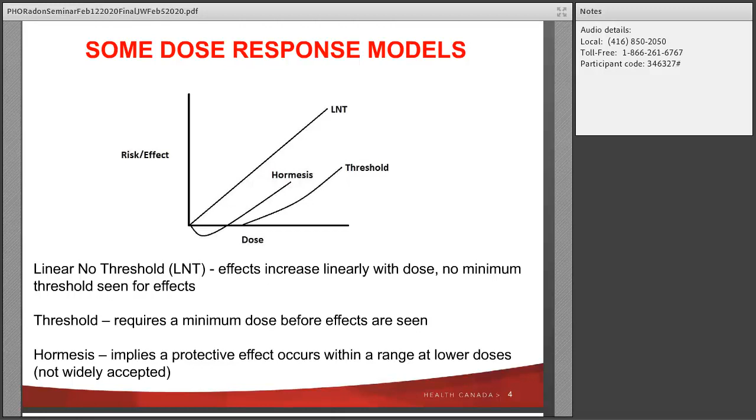But the universally accepted dose response model is the linear no threshold, and that's a straight line through the origin. There is some uncertainty in the LNT down at very low doses, but the scientific community generally accepts the linear no threshold model for radiation-induced health effects.

Two slides here on the history of radon before I hand it over to Kelly for her next part of the presentation. And this is kind of how we've gotten to today over the last more or less 500 years or so. So way back in the 1500s, in a particular region of Europe, the Ore Mountains, which is a mountain range that separates Germany from the Czech Republic,

metal miners were getting extremely high mortality from respiratory diseases. And it was called mountain sickness, among other names. And it wasn't uncommon for wives to have 6 or 7 husbands during their life, because they would just all die in a very short period of time, like over a number of years. Fast forward to 1838, when German pathologist Johannes Muller discovers lung cancer as a disease. A couple of decades later, lung cancers are found in autopsies of these European miners.

1896, the famous Henri Becquerel discovers radioactivity. And a couple of years later, the Curies discover radium, which is the immediate parent of radon-222. And then a German chemist named Frederick Dorn in 1900 discovers radon, the gas, naturally occurring when, not surprisingly, studying the radium decay chain. In 1924, it's hypothesized that radon could be a cause of lung cancer in miners from the Czech Republic, again, where miners had a very high incidence of lung cancer, and the measured radon levels in these mines were very, very high. As the 20th century goes along, by the 1950s, it's recognized that radon causes lung cancer in underground miners.

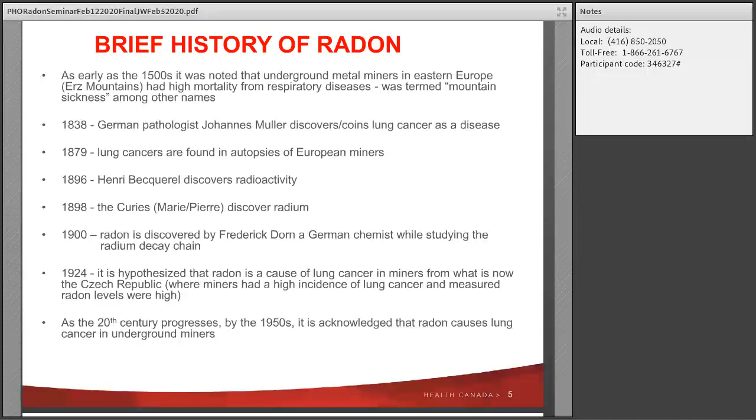Fast forward a little bit to 1984 in Pennsylvania. This is a very famous story. I know some people might already know. A gentleman named Stanley Watras, who was a nuclear engineer, was walking into a newly built nuclear plant. And this is before the plant has gone critical. There are no nuclear reactions going on in a core right now. He sets off the portal detectors walking into the nuclear plant. And of course, all the radiation safety professionals start scratching their heads.

Long story short, they find that the source of this radioactivity all over him is coming from his home, which was sitting at something around 100,000 becquerels per cubic meter. The U.S. EPA very quickly adopts a radon guideline at that point of 148 becquerels per cubic meter. By 1988, radon is classed as a human carcinogen, class 1A, top of the heap by the IARC folks. And Health Canada promulgates the first Canadian radon guideline at 800 becquerels per cubic meter. There was no scientific program associated with this. This was just a radon guideline.

In the 90s, researchers start to report lung cancer studies from residential radon exposure. 1998, the BEIR VI report comes out. And in the early 2000s, a number of famous epidemiologists start pooling results from residential radon exposure studies. And it's recognized that radon at levels in homes is the cause of lung cancer.

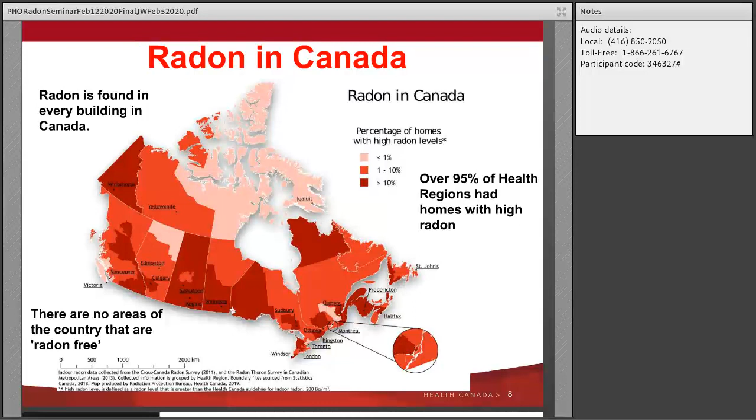So what are the health risks of radon? Radon is the leading cause of lung cancer in non-smokers. We estimate that over 3,000 lung cancer deaths each year are radon-induced, and it's the only known health effect associated with long-term exposure. Smokers also exposed to high levels of radon have a significantly increased risk of developing lung cancer. And really, the story of radon from a health perspective is it's preventable. There are actions that can be taken to reduce exposure and reduce your risk of lung cancer.

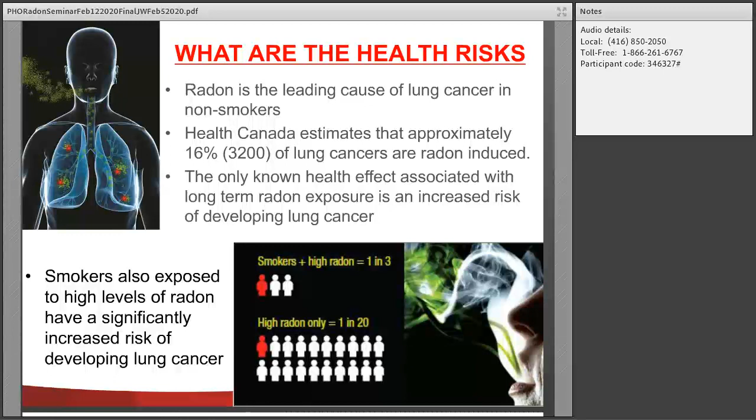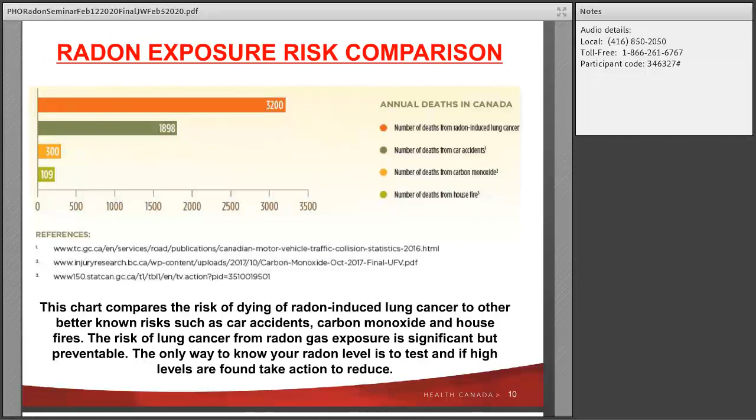But there is a very big portion of the Canadian population that doesn't know about radon or isn't worried about it. And so the purpose of this type of exposure risk comparison is to help people compare it to things that they understand better. So you can see that this chart compares the risk of dying of radon-induced lung cancer to other better-known risks like car accidents, carbon monoxide, and house fires. And really the communication is if you're doing something about those things, then you should also be testing for radon.

So testing, how can you test? There's two options. It's really simple. And that's the important message, again, coming back to this whole concept of prevention. It's letting people know what it is and what the health impact is, and that they can do something about it. So from a testing perspective, two options. You can hire a certified radon measurement professional, or you can purchase a do-it-yourself test kit. If you purchase a do-it-yourself test kit, you're likely spending somewhere in the range of $40 to $60. If you hire someone to do it for you, you're going to pay more. It's a service that you're paying for.

Health Canada recommends that you test during the fall-winter timeframe, and that you use a long-term test for a minimum of 3 months. There are short-term tests available on the market, but the risk with those, and Jeff will talk a little bit about this in a minute, is the risk of false negatives and positives. The easiest thing to do if people are asking you how to test or where they can go to test, and actually I should have updated the slide, is just tell them to go to takeactiononradon.ca. And right from that website, there is a button to purchase a test kit or hire a certified professional.

The other message that's really important, because we often hear this when we're engaging the public and other stakeholders, is, okay, great, I don't want to test. I don't want to know, because I won't be able to do anything about it, or it's going to be really hard to deal with it. And that's absolutely not the case. So radon reduction, reducing the amount of radon in your home, is easy. Techniques to lower radon levels are effective and can save lives. Radon levels in most homes can be reduced by more than 80%.

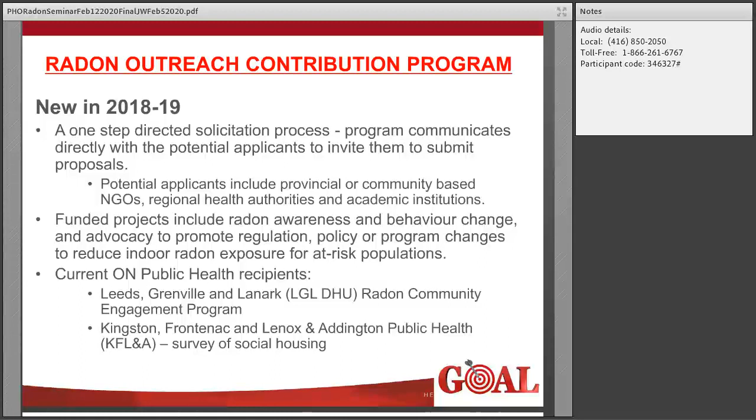So key to radon outreach and education efforts has been the development and trial and then expansion of many different types of targeted programs. So over the last 10 years, we've tried many different radon outreach approaches and pilot projects across the country to raise awareness and promote action. Some were effective over time, and then we expanded on them. Others were not.

And that for me is great as well for the National Radon Program, because we've really struggled in how to make radon testing more accessible, let alone mitigation, and that's one we're still trying to figure out, but more accessible for people below the poverty line, for example.

Also included in there, you'll see we've been updating and sort of rebranding our materials. So, for example, for those of you that have been working with the National Radon Program for a while, we used to have a pamphlet that was titled Radon Gas. Now I even forget what it's called. Is it in your home? I think it was a question mark. And now we've changed that to radon gas, it's in your home, making a much more clear statement because it's not a question as to whether or not it is or isn't.

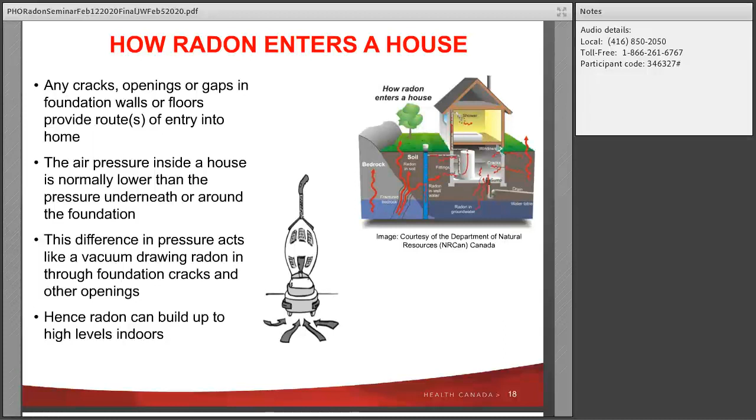One thing I will just briefly mention, I don't know if anyone noticed this, in the graphic on the top right, you see a shower there. And radon in well water can sometimes exist at very high levels. And so when water comes into a home, such as in showering or laundry, etc., it will outgas from the water into the air. And that generally is not a significant source of indoor air radon, but in exceptional cases, it can be. So I just mentioned that in passing.

Okay, why long-term testing? Kelly has alluded to this, and we've seen this over the 10, 12 years I've been working in radon, and Grace and I continue to see it all the time in the research that we do. Radon levels fluctuate. It's not uncommon to see 20 times difference between low radon levels and high radon levels. So if you happen to test your home for 2 days and you're in a couple of good radon days, you could be fooling yourself. And conversely, if you're in a bad couple of radon days, you could also be fooling yourself.

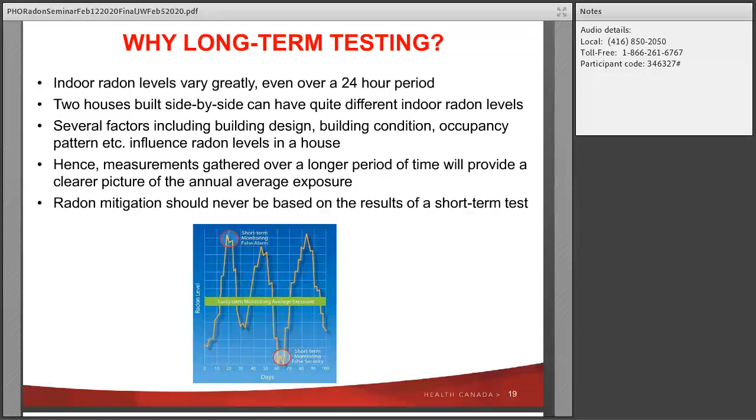So false positives and false negatives are fairly significant from short-term testing. So that's why you should never base a radon mitigation decision on the results of a short-term test. So that's just sort of to reiterate what Kelly mentioned earlier, because we see this all the time.

We have some pretty brutal winters, as everyone knows, and there are some significant problems with icing and such when you do above roof discharge scenarios. But as Kelly alluded to, high radon levels can be easily fixed. And we find with ASD, it's typically well above 90% radon reductions we get from it.

And we also always recommend certified mitigators. Some people who are very qualified can install their own ASD systems, but it's sort of, don't try this at home, kids, is what I usually say. And it's not that expensive. As a matter of fact, in new construction now, ASD installs are coming down around the $1,800 mark. In retrofitting in existing homes, they're up around $2,500 to $3,000, depending on the complexity of them.

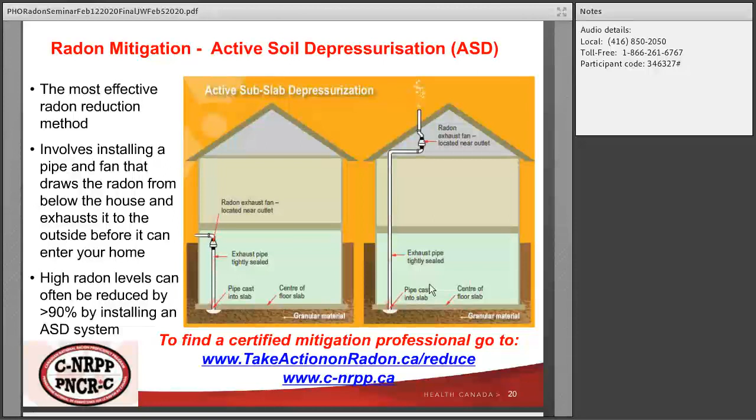So we looked at indoor radon data from 66 countries worldwide using the big risk models, the BEIR VI radon risk model. And we actually used a couple. But in terms of the worldwide average radon lung cancer risk, it's in the 14 to 16% range, which is really good convergence to what we actually found in Canada.

The second paper was looking at some interventions in new construction and quality-adjusted life years in different parts of the country. From a provincial territorial standpoint, it was found that the Yukon was estimated to benefit the most from these particular interventions in new construction. Paper 3 was interesting because it looked at radon mitigation in both existing and new construction.

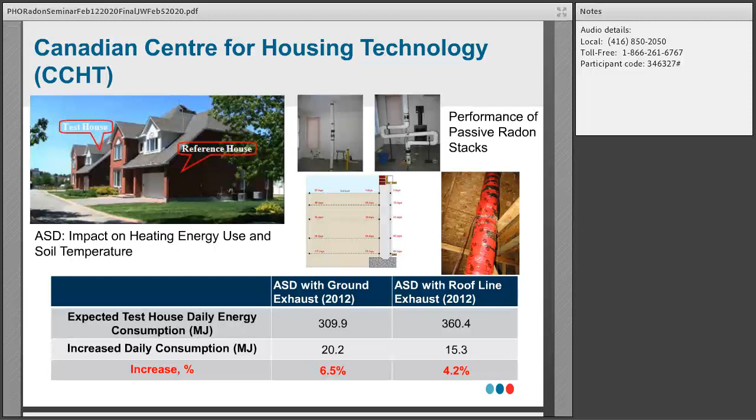And also, as Jeff and Kelly both mentioned, there's another way to prevent radon entry, especially from a building code perspective, which is the radon or air barrier system. Since 2014, NRC developed North America's first radon diffusion test chamber. This test chamber was developed to the requirements of ISO standard 11665 to test radon diffusion in different building materials. Since then, we have tested a variety of materials, including different concrete products, different membrane products, different spray foam products, even rigid insulation foam boards.

The reason we're doing this testing is we receive requests from the industry, but more importantly, Canada is currently moving towards a net zero energy ready model code, which means for subslab insulation we will not wait much longer to have that in place.

So if one material can be functioning as insulation material, but also as a radon air barrier, then it's one stone for several birds. And I would like to mention, previously I mentioned that we work very closely with the Canadian Construction Materials Centre. So in 2017, we actually developed quite a few technical guides, but here I just give one example. It's the technical guide we tested for the evaluation of spray foam product for radon prevention, and the product passed this evaluation and is already in the market.

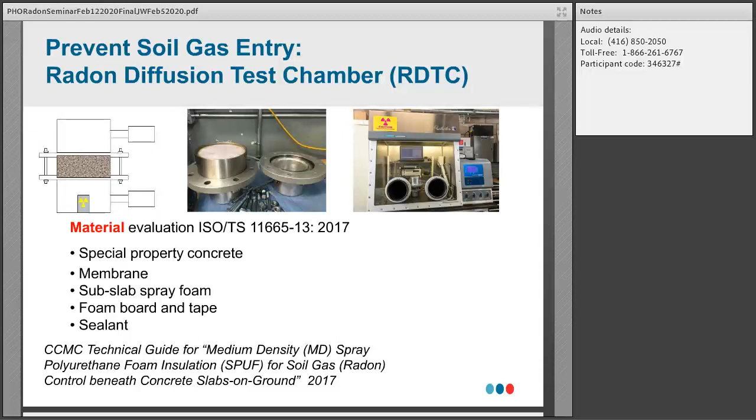And also I would like to mention within NRC, we have another group that developed a low-cost, direct reading, continuous radon monitor. It was with the advanced electronics and photonics group. And currently that monitor, the prototype, is actually being tested in our radon chamber for benchmark, so we can compare the readings between that monitor and the many other more sophisticated radon monitors we use for the diffusion test.

And the previous radon diffusion chamber is a small benchtop test, but we also developed this unique test facility called the radon infiltration building envelope test system. So this one is basically a mock-up house of 6 feet by 6 feet footprint. The difference between this one and the radon diffusion chamber is in this mock-up house, we usually install a different material or product within the floor assembly following the instruction manual provided by the industry or by the manufacturer. So this is not only for material testing, but for the whole product evaluation. This facility has been used very extensively to support the CCMC different product evaluation as well.

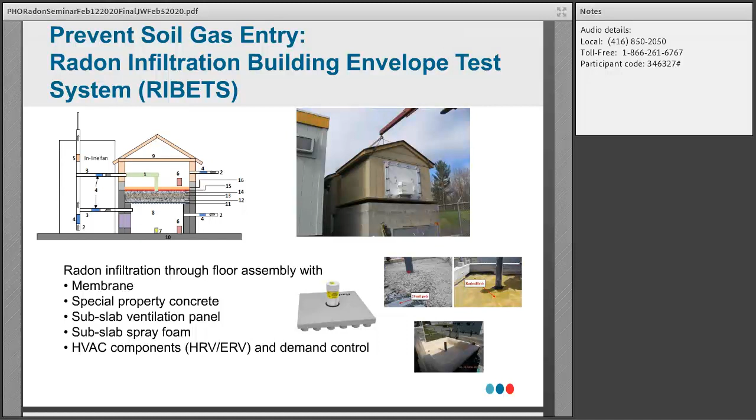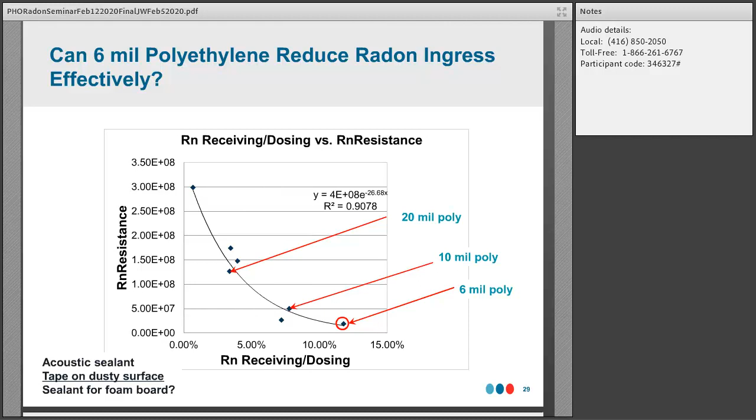You can see the 6 mil poly is the point far to the right, and it has more than 10%, actually about 11%, of receiving radon concentration divided by the dosing radon concentration. This ratio is about 7% for 10 mil poly. And for 20 mil poly, the percentage is 3%, meaning if you have 1,000 in the subfloor area, you would only get 30 in the living space, provided this membrane is very well sealed and very well taped at all the penetrating points. Again, when we test different products, we try to test in combination with the proper sealant or tape or whatever sealing mechanism they would like to use.

And here comes another topic, which in recent years is a pretty hot topic. It's about the passive radon stack. In the British Columbia Provincial Building Code, it's called a radon venting pipe. Since 2014, British Columbia became the first province to mandate the installation of a full height radon vent pipe, which extends through and terminates outside the building, in its so-called radon area 1, which is the higher radon risk area. And from this little plot, you can see area 1 is actually the majority of British Columbia, mostly the inland, the area excluding the coastal area.

Since 2015, we as National Research Council have received several National Building Code change requests to include such a system into Part 9 of the National Building Code. So passive radon stack, as Kelly and Jeff both mentioned, especially Jeff, is about 50% effective in terms of radon reduction. But previous research has also demonstrated that in colder climates, which Canada is within, this passive radon stack, because it's essentially using a chimney effect to withdraw soil gas, can be more efficient.

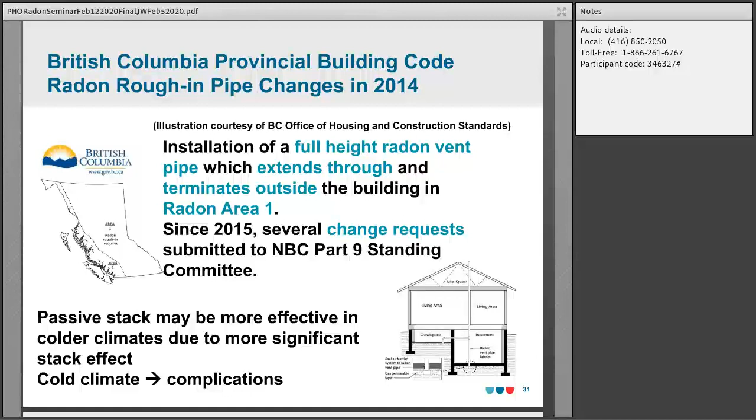However, colder climates can introduce other complications. For example, as I mentioned previously, condensation development, ice buildup, and even other complications to the design and operation of such a system. Therefore, after we received those building code change requests, NRC decided to do full height passive radon stack field studies. We want to verify the actual performance of this system in Canadian homes over a long-term testing period. This study is to support the National Building Code Standing Committee to address the building code change request.

And prior to the field study, we did a few years of lab study in NRC's research houses. We already figured out the insulation requirement, the pipe routing, the impact on the pressure loss, the stack height and the stack length in the attic, and also what measurement parameters we should include in the field study plan.

So in 2017 to 18, we did 4 homes in the National Capital Region first, and then starting from 2018, we started doing more studies in British Columbia and also in Ontario. I'm only going to focus on 2018 to 2019. We did 2 retrofitted homes in Ottawa, Ontario, and 15 new homes in British Columbia, Prince George area. We picked those 15 homes in Prince George because they were all built after December 2014, so they already had the passive stack in place when we started testing.

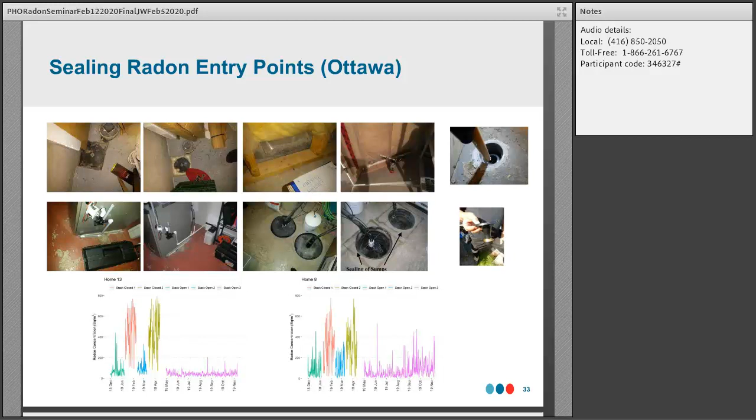So in all the 17 homes we tested last year, it's very clear to us that when the passive radon stack was open, all the homes had radon concentration below 150. Especially for the homes that naturally have radon concentration above 200, the radon reduction effectiveness associated with the passive radon stack was very, very obvious.

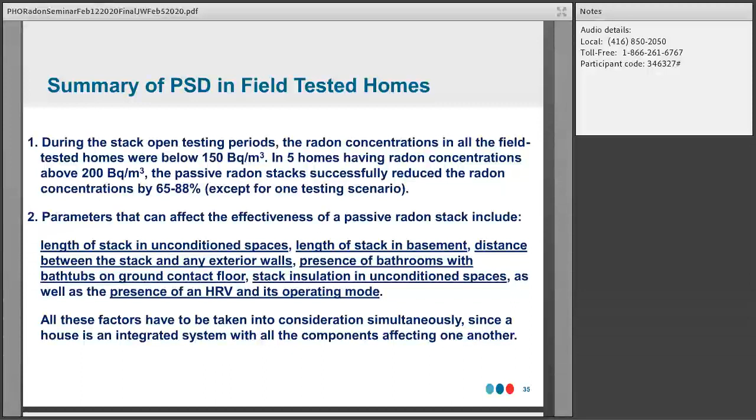So another radon control method people quite often would like to know more about is heat and energy recovery ventilators. So we actually started 2 years ago to do a field study of HRV or ERV for radon control. In those homes, we would monitor radon, but also set the operating status of the HRV to different modes. For example, if you take a look at the 2 plots on your left side, this home has 2 HRV units. So we would operate 2 HRV units and measure the air changes per hour in this house. Then we operate 1 HRV and measure the air changes per hour as well. And then turn both HRVs off and measure the air changes per hour. In the meantime, we monitor radon concentration in the same house.

So in this house, we observed when we had both HRVs off over 18 hours, the radon concentration increased to over 200 becquerels per cubic meter. However, after we turned both HRVs on, within 4 hours, the radon concentration dropped from above 200 to about 33 becquerels per cubic meter, which was very, very effective.

However, in the house on the right-hand side, we kept the HRV or the ERV off and measured the air changes per hour, then we turned the ERV on 20 minutes for every 60 minutes and measured the air changes per hour, and then we turned the ERV on full speed and measured the air changes per hour. And you can see the blue portion of the radon concentration plots is when the ERV was turned on 20 minutes per 60 minutes, and the radon concentration is around 500 becquerels. When the ERV was working full time, the radon concentration was still above 200. However, when you turn the ERV off, the radon concentration was above 800. So this demonstrates HRV and ERV can be used for radon control, but it's more suitable for houses that are naturally very airtight with only moderate radon levels.

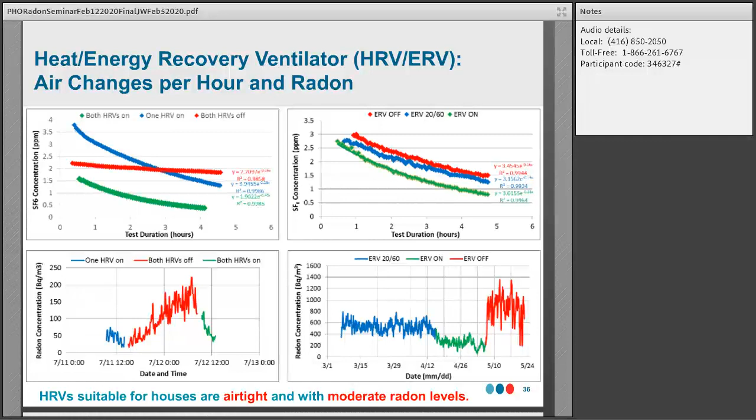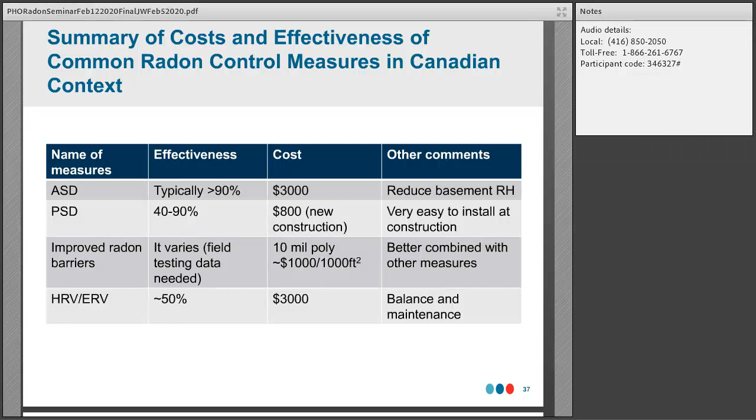One analogy we like to make occasionally is between carbon monoxide and radon, and they're both actually known as the silent killer. I particularly like carbon monoxide to be known as the silent assassin because it tends to kill you very quickly. Conversely, although radon risk takes a long time to develop lung cancer, unfortunately it's diagnosed too late, and the fatality rate is still about 85%. So it's not a very happy diagnosis when you get hit with a lung cancer diagnosis.

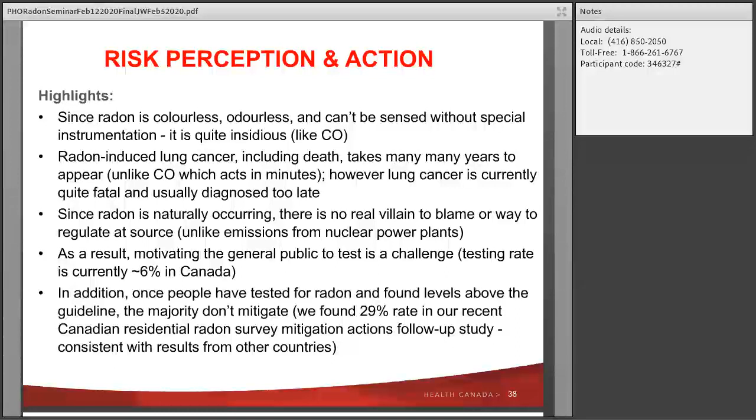And we found that the current testing rate in Canada is around 6%, and when we did our follow-up study, we found only about 29% of people mitigated, which is consistent with many other countries. So it's still hard to motivate people. These are just, I've put on in passing.

So I'll talk a little bit more about NRC future work, 2019, 2020, and beyond. One of the most important things is the task group for the passive radon stack building code change request. The meeting will take place very soon. I believe it's next month. Oh, next week. And also we're hoping we can build more and more data, the database of building materials and products for radon control.

And as of 2020, this year, we're doing the passive radon stack field study in 22 more homes in Manitoba, in Quebec, in Ontario, and in British Columbia. And we are currently recruiting more homes to join the HRV, ERV field study for indoor radon control. And as I mentioned, we are hoping the net zero energy ready building code will introduce more change to the Canadian building stock. So we want to do more radon and also indoor air quality related study in their buildings.

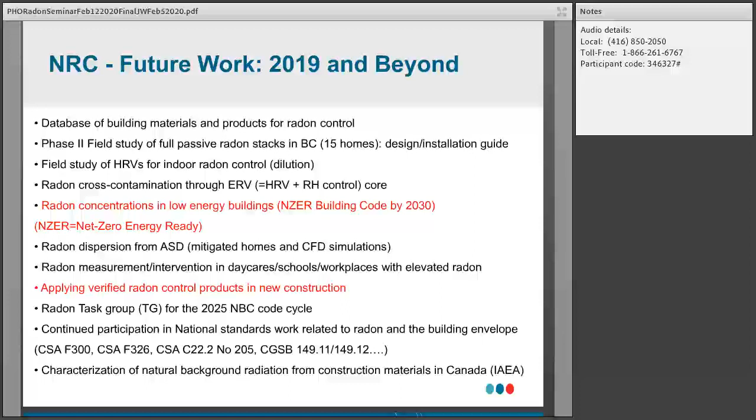And we are continuously working to support the different national standards development. For example, the F300, the building depressurization, F326, the mechanical ventilation system in residential buildings, and so on. So those are a couple of things, and both Jeff and I were working, as Jeff mentioned, for the International Atomic Energy Agency to develop different safety guidance documents in relation to radon and building materials.

So that's our slide deck. It was very ambitious, and I hope you got some interesting stuff out of it. And I know we ran a little late, so we'll take questions, I guess, at this point.

We have a question from Martha for Kelly. What data source informs the radon map? Only data collected by Health Canada? Yes, at this time we're using only our data from the 2 large-scale cross-Canada surveys that we've done.

We have a question from WDGPH. Why are radon levels different for Canada and U.S., 200 becquerels per meter cubed and 148 becquerels per meter cubed? Any studies that support 200 becquerels per meter cubed? So this is Kelly. I can speak to that. We often get the question why the difference in the guideline level between ourselves and the U.S., and also with the guidance from the World Health Organization recommending 100 becquerels per cubic meter.

So Health Canada continues to review and consider changing the guideline level. At this point in time, we've decided to keep our guideline level at 200. With regards to the difference, the actual difference between ours and the U.S. is quite small. What I think for us is really important is how you communicate the risk around radon. At 199, you're not safe. And we make sure it's clear in our communication, in our materials, et cetera, that there is no safe level of radon, that ultimately it's guidance, it's a guideline level, but ultimately it's up to each individual to determine their tolerance for risk.